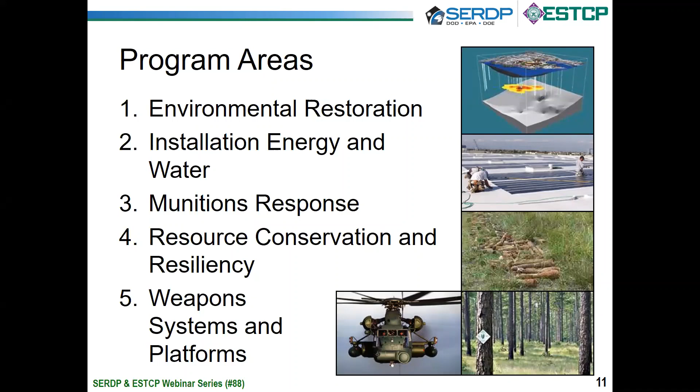There are 4 program areas in SERDP and 5 in ESTCP. The Installation, Energy, and Water program area is only found in ESTCP, while the other 4, Environmental Restoration, Munitions Response, Resource Conservation and Resiliency, and Weapon Systems and Platforms, are found both in SERDP and ESTCP, programs managed jointly by a designated program manager.

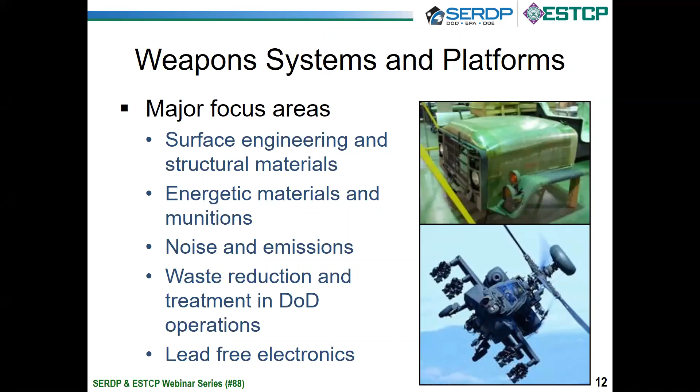Our webinar today is focused on research and demonstrations that were conducted under the Weapon Systems and Platforms program area. This program area has essentially 5 major focus areas. First, surface engineering and structural materials. Second, energetic materials and munitions. Third, noise and emissions. Fourth, waste reduction and treatment in DoD operations. And finally, lead-free electronics.

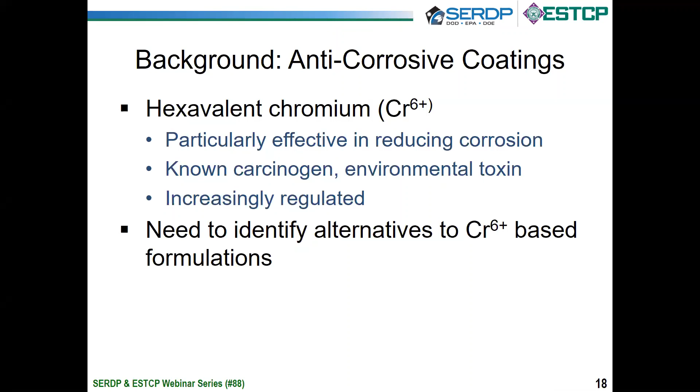As you're developing coating systems, it's important to understand if they're going to work on your system. The easiest way to do that is take components or samples, expose them outdoors at various locations, and see if they work, and you're going to know whether they work or not. The problem with that approach is it's time-consuming, and you can only put them in limited places. So if you want to accelerate the development of coating systems, you need some kind of screening test.

So in the Department of Defense, and in all industries for that matter, accelerated corrosion tests exist, and a number of those are available and widely used in the Department of Defense.

But here's the problem: they don't fully replicate corrosion observed, and that's particularly true for multifunctional coatings, which are most of the DoD stuff, at least for external mold line. Coatings that act as barriers but also have the ability to deliver inhibitors, or metal-rich coatings, to do protection. As you start having more functionality in coatings, these tests become particularly poor at defining performance.

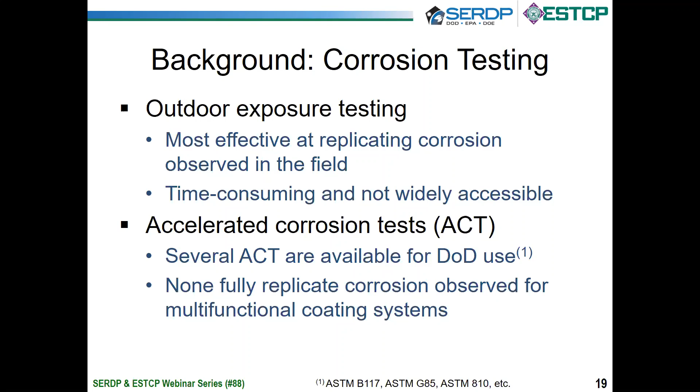So the objective of the 1673 project was basically to create an improved accelerated test, and there were a number of goals in that. The first was to accurately replicate corrosion damage modes, and then once we're able to accurately replicate them, we'd like to accurately rank materials performance.

So we've got this wealth of data from outdoor sites. Can we get in the lab the same rank order of performance? A nice side benefit of all this would be if we know the levers to pull to control the corrosion rates and the kind of morphologies, perhaps you can develop tests where we can control the severity in those tests. So that was an important thing.

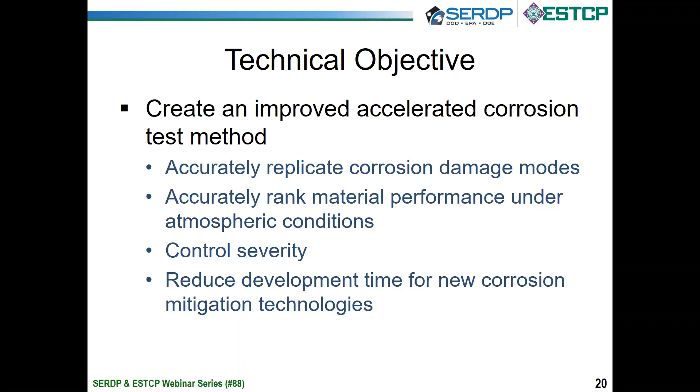But the biggest thing here is, again, these are screening tests. So if you want to reduce development time for new corrosion mitigation technologies, you've got to be able to test in something that's going to give you some general warm fuzzy that what you're doing is appropriate.

So there's a number of things that we did within this effort. The first was to integrate representative sample designs. We've used a one-off sample design from Naval, who were one of our team members on this program, a lap joint sample with fasteners, countersunk fasteners through that, and we had some Army replicate panels that had steel fasteners through panels as well.

This is to get away from the simple approach of putting a coated panel out with a scribe in it, because where we see failures isn't always in what I'll call the field, or even right next to a scribe. There's other things driving that.

The other thing that we wanted to do in this program was determine how critical environmental parameters affect corrosion and mechanical properties, and I'm going to spend the bulk of this talk talking about those. So what is it that drives it, and how and why?

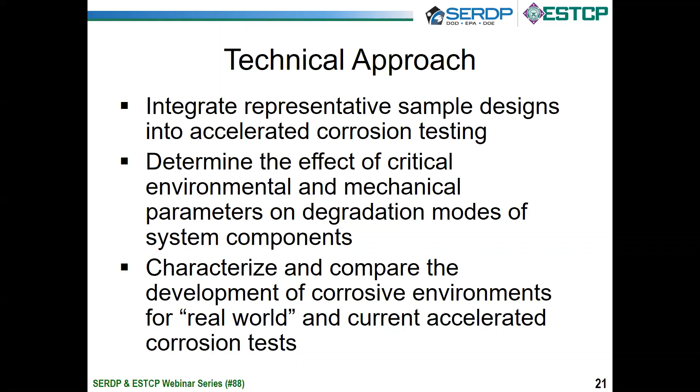And then the last thing we wanted to do is, once we understood what those levers are that affect severity and that affect different damage modes, can we look at what we currently do in the lab versus what's going on at real world field sites, and get an idea of what we're missing in the test, and try and fill in the gaps with that.

Okay, so I'm going to start focusing on some of the results here. For those of you who want in-depth details of all the techniques we used, I recommend, if you'd like to go read a 400-page report, go see the final report for this project. But there's also a number of publications and papers that document all the procedures in this. What I want to accomplish today is a high-level picture of a number of the things we found, particularly the effect of relative humidity.

All right, let me orient you to this first figure. What you see is on the x-axis relative humidity and then corrosion rate. These were samples that had a matrix of sodium chloride or other droplets put on them, and you can see the corrosion rate after one month of exposure. On the right, you see what are considered the ISO levels of high, moderate, low, and very low corrosion rates that you see in the field.

For those of you familiar with atmospheric corrosion testing and the ISO 9223 standard, one of the things they clearly note is that they believe corrosion happens above 0 degrees and above 80% relative humidity. So as you look at these corrosion rates from these steel panels, you can clearly see there's corrosion occurring at moderate and/or low levels, certainly down at 65%, which is well below the deliquescence point.

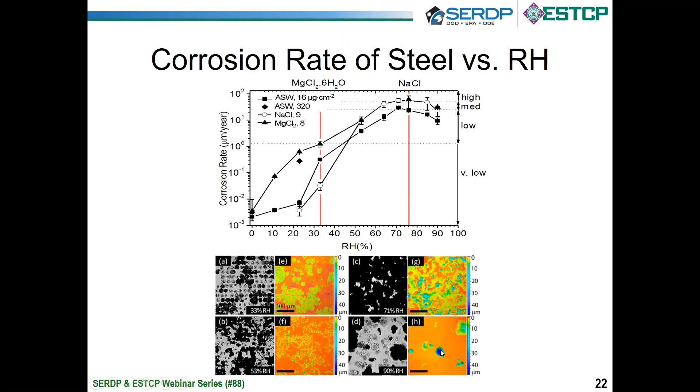The reason for that is because as you go above the deliquescence point, you get fully deliquesced salt, and the droplets coalesce into a thin film. So you have a large cathode. Instead of corrosion being driven by just what's going on around the edge of a droplet, the electrochemistry and cathodic reactions can occur at a distance. So you get single or small anodes that become very deep.

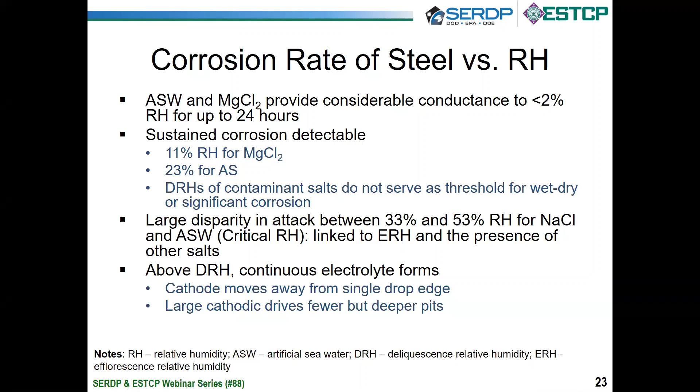So to summarize all of that, if you just looked at magnesium chloride, you can have corrosion going on down to 11%. And if you load up enough artificial seawater, corrosion can happen down at 23%. Again, it's very low, but it happens, and there's a large disparity of attack. So corrosion happens under the deliquescence point, and the morphology of that corrosion is very different under the deliquescence point than above it.

I'm going to move on to talking about aluminum alloys. What you see in these pictures are images from two different exposure techniques. This is the standard B117 continuous fog, and this is G85A5, the cyclic technique with a much more dilute solution, but pH'd at about 5 instead of allowing it to be neutral around 6.5 to 7.

These are aluminum panels with a CRES fastener, a stainless fastener through the middle. You can clearly see the difference in behavior from the continuous test to the cyclic test. So one of the things we wanted to figure out was why and what's driving this.

In a lot of the work we've done, we use multi-electrode techniques. Please refer to the report and papers written for the discussion of this. Basically we had 100, these 10 by 10 matrices that represent the electrodes, made out of wires that were 250 microns and close packed to each other. In this configuration, and in all these images, these 16 electrodes were made out of steel, and the rest were aluminum.

The other thing I'll note is anything you see in red here is corrosion, and anything in blue is a cathodic reaction. The last thing I'll mention is that the top 5 rows of electrodes were covered. In these images they're covered by tape, just blocking them. In a slide I'll show you later, these are actually covered by paint films.

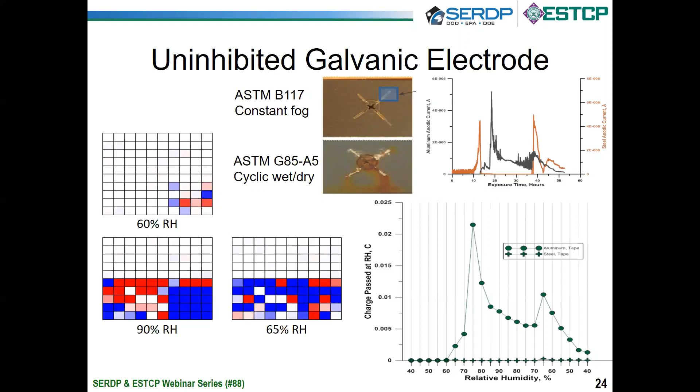Basically, this is increased corrosion rate as you go through wetting and drying. So this is under more or less steady state electrolyte conditions. Why this is important is because if you're cycling tests, if you have very short wet cycles and very short dry cycles, these surfaces may not come to some kind of steady state condition as they're passing through wetting and drying, and you end up with very high corrosion rates. As I mentioned on the last slide, what you see as subdeliquescence corrosion can be significantly different than what you see in corrosion that occurs above the deliquescence point.

All right, so this is just summarizing that. What I'll say is that relative humidity suggests that relative humidity is the strongest thing governing galvanic coupling. Again, most of that charge, there's a large amount of charge that's passed as you go from wetting to drying conditions. But even under the wetting conditions, you can clearly see that corrosion happens. Corrosion, again, does happen in galvanic couples below the deliquescence point.

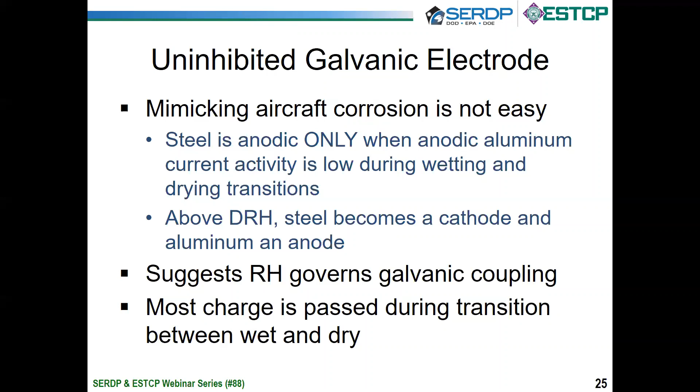The next thing I'll talk about is some work that our team members from Luna Innovations had done for us, in conjunction with some work that we did on this. So what we did was took small coupons, an inch, and put through those a fastener, a steel fastener, and then we coated those with a number of coating systems, either non-chromes or chromes, or left them. We've exposed these things to a number of cycles, which you can see here.

Let me point out a couple important facts here. In this first cycle, you can see that we're at 90% relative humidity, and we dropped that relative humidity down to 40%. So this is a two-step cycle. We hold that at 90 for 2 hours and dry it for an hour. In the second cycle, we have the same wetting and drying time, but instead of drying it, we drop the relative humidity only to 65, so that sub-deliquescence point.

But we know corrosion is still occurring. And in the last, we fully dry it, but we completely change the time of wetness. So this is the absolute time of wet in any given cycle is increased by a factor of 4. And let me point out that all of these have the same total time of wetness through the test. The other thing I'll note is we only put salt on this once a week.

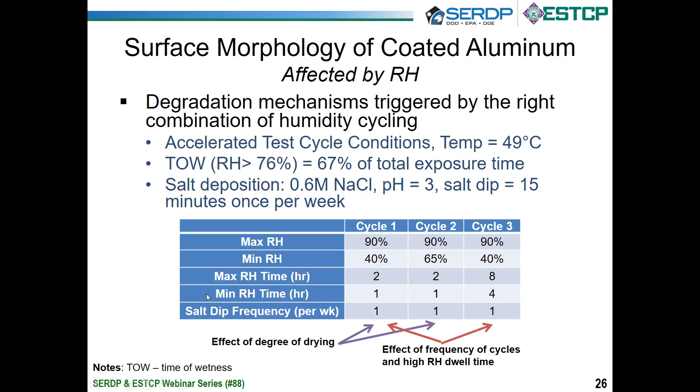This is a modified, basically the ASTM G85, so acidified salt, and we put this through this cycle. That salt was only applied once a week by dipping the panels. You'll see in the next slide the kind of damage that we see. I don't have an image of the first one, but I can tell you that there was delamination, though there was very little depth of the attack.

So it was small depth of attack with significant delamination. The interesting thing starts happening in cycle 2, where we did not fully dry it. On the left you see the digital images, and on the right the digitized images, so actual photographs and then the digitized versions.

The thing you notice in this test is that we see this exfoliation corrosion. These red things are above the plane of the surface, so we basically significantly exfoliated the surface. All this stuff in blue is corrosion that happened, and this outline is where we've delaminated coating. So there's no coating here, and corrosion has occurred in this area.

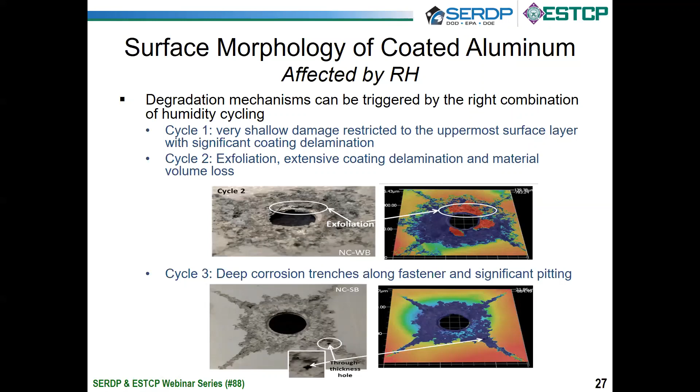In the third cycle, where we fully dried the sample, we again see fairly significant coating delamination, but very deep attack. In fact, this is a pit where if you hold it up to the light, you see light coming through the sample. So the kind of attack where you see exfoliation happens in these semi-drying conditions, but also the degree of attack is a function of the total time of wetness in a given cycle. These two samples saw the exact same total time of wetness, and how we distributed that across the cycle was important.

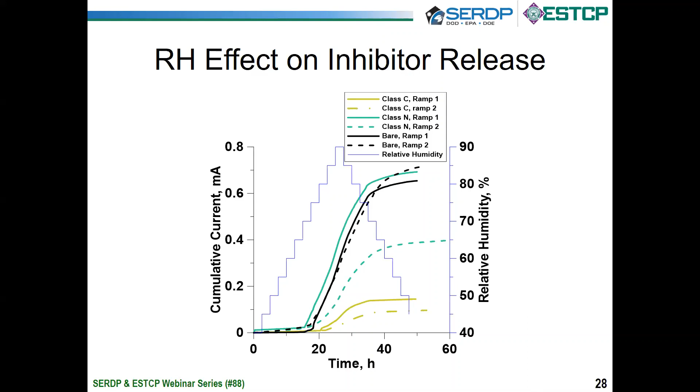So this may explain some of the phenomena we see in accelerated corrosion with non-chromes. There always seems to be some staining in the scribe, particularly true for accelerated corrosion tests.

To summarize, looking at the cumulative currents, you see these big knockdowns. So you need some kind of initial wetting that goes on before you can release these inhibitors, and then you protect the surface during subsequent wetting. This just kind of quantifies that a little bit.

You can see in this last row here a knockdown factor from the first and second cycle, and that's true for both chromate and non-chromate, class N coatings. But it's particularly interesting to look at the total that's been knocked down from the original amount. For a chrome coating, we're only about 10 to 15% of the cumulative currents passed, and only about half the currents passed otherwise. So you can see how much more effective chrome is as an inhibitor compared to these non-chromes.

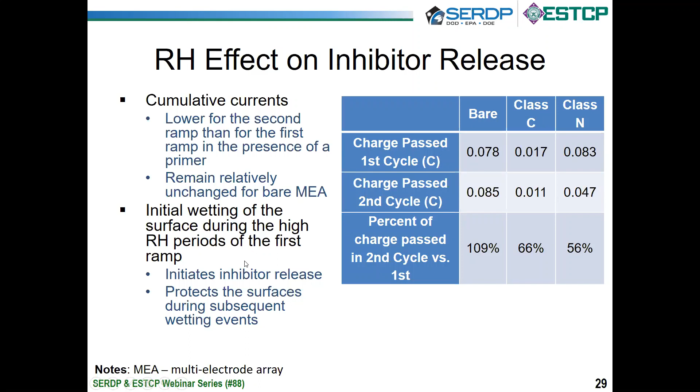Okay, next thing we wanted to look at was intergranular corrosion and stress corrosion cracking. This data is also from Luna Innovations, the team members there.

To orient you, this is relative humidity, this is crack growth rate, and what we did was cycle the relative humidity going both directions. Luna has developed some pretty nice sensors for measuring crack growth rates in situ. What you see here is that as you cycle the relative humidity forwards, you're on this set of curves; as you cycle it backwards, you're on this other set of curves.

The point I want to make is as you cycle these things backwards, once you're in this subdeliquescence region where we see exfoliation and corrosion still occurring, you get large increases in the crack growth rate. In this example, these increases in growth rate become more severe the longer you run the test.

I'll note these things are also a strong function of the solution chemistry, so pH and what you do. If you were to run this in a G85A5 versus an A2, you get significant differences in behavior. Let me note, this is data from the G85A5, so the dilute chloride at a pH of about 5.

You might say, oh well, this is sensitized, and this is a pretty highly sensitized 5000 series alloy. But we've done, and Luna has done, work on 7000 series alloys, and you still see the same kind of effect. In fact, up to a factor of 10 if you're looking at some of the fatigue data not shown here, from other work that we know.

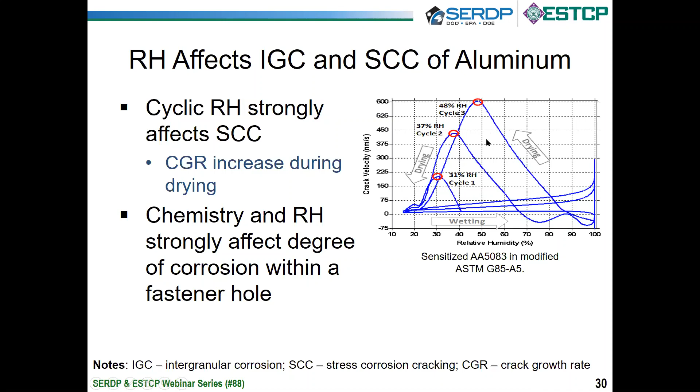Also, mentioned exfoliation. As a portion of this program, we had samples exposed outside. These are images down a fastener hole, actually from Point Judith, an industrial coastal site that Alcoa owns. So what you're looking at is the edge of the 7000 series aluminum. What would have been here was a fastener, and you can clearly see the significant amount of intergranular corrosion going on in here.

This was a panel exposed by colleagues at AMCOM that did these, and if you look at that same sample, you see this intergranular corrosion in here. This was a separate sample we exposed to an environment developed at the University of Virginia, very close to the ASTM G85A2.

The cycles are a little bit shorter. The main difference between these two environments is that the pH is dropped to about a 3. Now let me note that you do not see any of this intergranular corrosion at all if you just put this in a B117.

So two things are important: number one, you need cycles to imitate this, and if you want to drive it faster, you can change the pH in the solution.

So again, we think this middle relative humidity range, moving into this, accelerates exfoliation and accelerates intergranular corrosion. We think the intergranular corrosion is actually partly related to what's driving the increase in crack growth rates during drying cycles. You see the corrosion happens, and clearly the morphology strongly affects delamination.

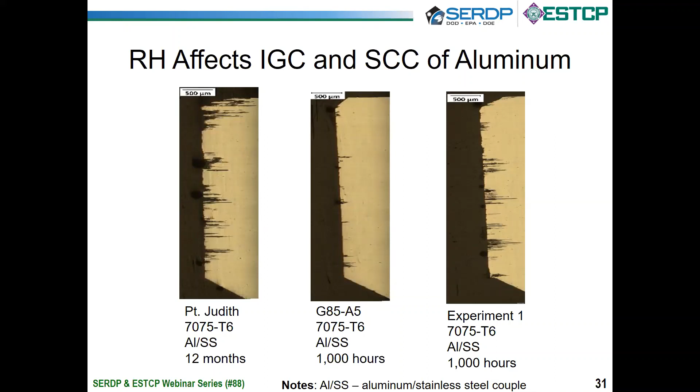All right, so that's important. This is a bit of an eye chart, and I don't expect you to read all this, but I wanted to point out a couple of things.

We ran some of these tests outdoors, and what we wanted to do is block out the percentage of time that in each environment we spent in specific regimes of relative humidity. For these outdoor samples, you can see they're between 40 and 50% relative humidity. This is the percentage of time above deliquescence, this is the percentage of time in that sub-deliquescence but corrosion range, above 50%, and this is below.

We can compare these to what you see in the rest. These are marked green because that's what you see as aggressive corrosion outside. Our laboratory tests are marked in red. Some of these are really aggressive, and you saw some of the images from that.

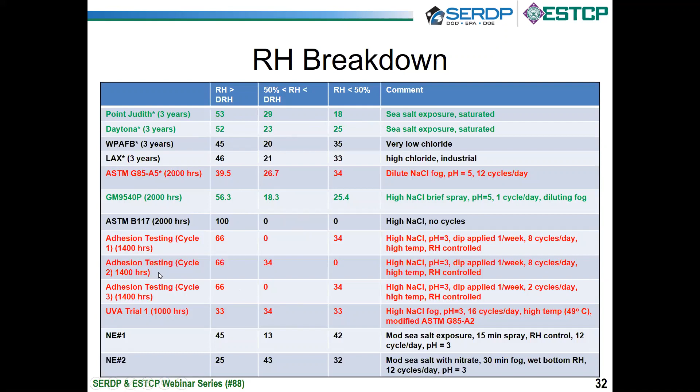So to summarize, we know we've got to have cyclic humidity. If we don't have it, we don't fire off the failure modes that we see in the real world, like I showed you in Point Judith. The other thing we know from real-world tests is if you want aggressive environments, you've got to be above 50% relative, or above the deliquescence point, 50% of the time.

In terms of coating delamination, it's a strong function of the time of wetness within a given cycle, as I showed before. Not only did we see the degree of attack change, the amount of corrosion changed. I'll show you that on the next slide.

In this figure, you can see the total time of wetness in each category, during wetting and drying in those intermediate ranges. These red bars represent the sum of these two. The important thing to note is these are the aggressive environments with their high percentage of time, but again, it's the amount of time in each cycle that's important.

If you have a complex coating system, like I mentioned before, and showed in the data that Erica Maka had done, you need a certain amount of time before you can activate inhibitors, or in the case of metal-rich primers, a certain amount of moisture has to ingress before you see the galvanic effects you're looking for. So again, this is important to consider as we're doing tests.

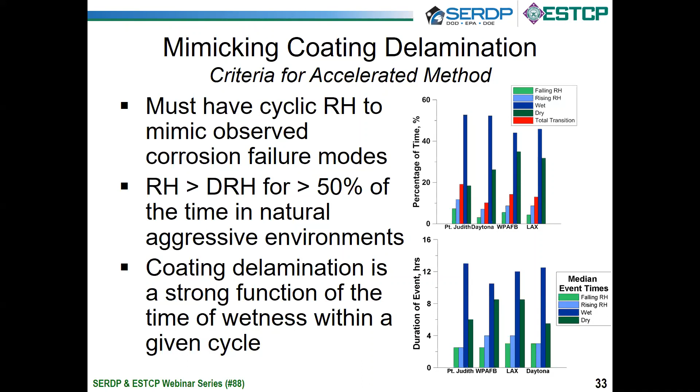These actually came from sensor data that's been out in the world. For those who don't know, there are other programs funded by both the Navy and the Air Force with multiple sensors at multiple locations, gathering large amounts of data on this.

Here's the interesting thing, though: if you look closely at that table, it's not simply a matter of time in the wet cycle, it's a matter of solution aggressiveness. In some of the solutions, we actually had very low wet time, but the solution was extremely aggressive. So there's a trade-off between the aggressiveness of the salt solution on the surface and the time of absolute wetness.

This is just a couple of examples, looking at surface delamination from those two cycles I mentioned before. Both of these fully dry, but cycle 3 has much longer time in the cycles. The amount of surface delamination, basically coating peeling off the surface, is greater the longer the time in any given wet cycle, even for the same total time of wetness.

Because of the aggressiveness of that attack, which is directly related to coating delamination in this more aggressive environment, this may be one of the tools we have. At 500 hours, we can distinguish coating performance, whereas if you run salt fog, you can run it for 3,000 hours and not see any difference. So what drives aggressiveness of solution is the pH.

I showed that in a number of cases. Obviously it increases salt deposition because it increases the surface area and taxes inhibitors more. And then the other thing is the amount of time above the deliquescence point, as I demonstrated here.

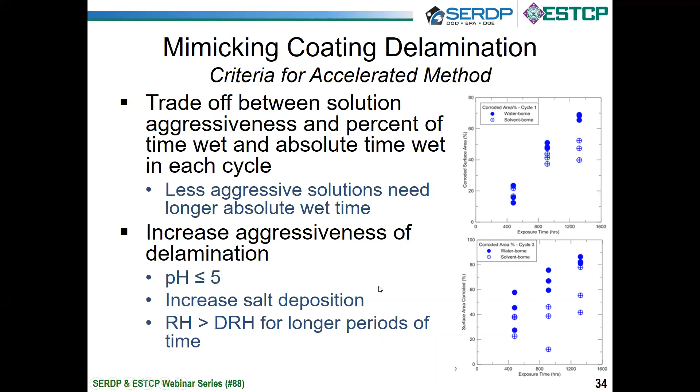All right, so with that, I'm going to start to conclude here. The single most relevant factor in atmospheric corrosion is relative humidity, but it's not simply the relative humidity—it's specific regimes of relative humidity. If we want to accurately replicate conditions, we can't just say ramp time this much; we've got to strictly control that. Atmospheric chemistry also plays a large role—pH and the amount of salts—and that has to be balanced with relative humidity in our accelerated tests as we move forward trying to find something better than this.

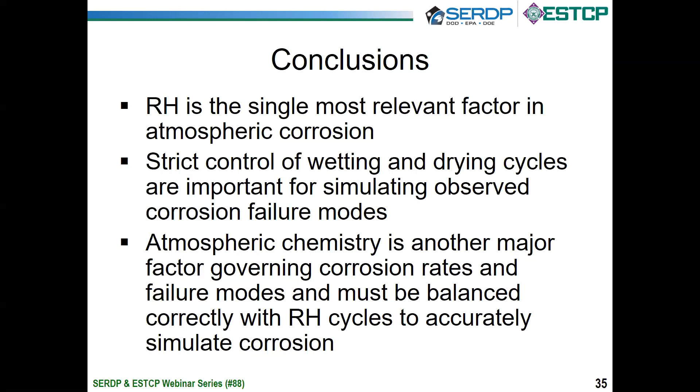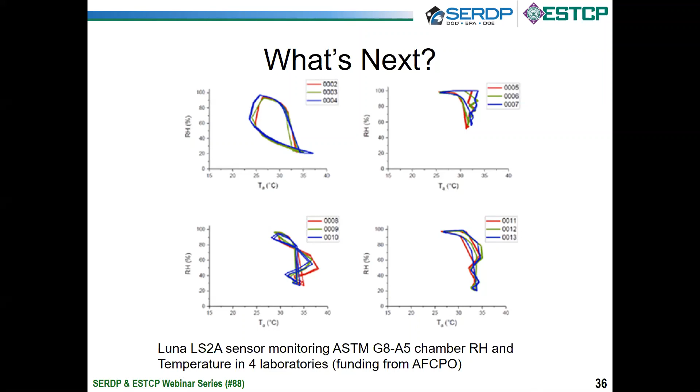Just to show you that middle point about strict control, this is some data funded by the Air Force from a program Luna had. If you put sensors in a chamber and monitor temperature and relative humidity as you cycle through, each chamber has a certain footprint. These are four reputable labs that have done this, and you can see we all follow the specs well, but our chambers didn't obey—well, they just work the way they work. So you wet for so much time, you dry for so much time, and hope you get the ramp rate, but how it gets from one place to the next is completely different. This stresses the importance of being able to define specific regimes of relative humidity.

So the next steps—and Alex will be talking a bit about this later—involve a follow-on ESTCP program to help finalize these, benefiting the Department of Defense by developing improved standard protocols. So what do we do to have some assurance in this as we develop more and make decisions about whether to take things to long-term field testing or put them on aircraft?

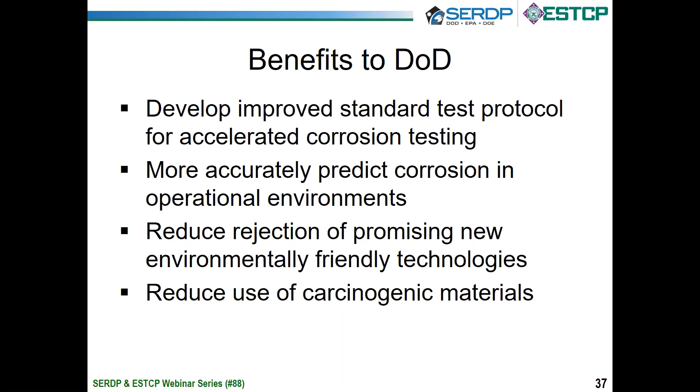So we can more accurately predict corrosion, and reduce rejection of promising new technologies—we reject things at the lab stage that look really good in the field. The opposite is true too: we let things through these screening tests, put them in the field, and they fail miserably. The ultimate goal of this is to reduce the use of carcinogenic materials, not just in the paints themselves, but in the cleaning processes afterward.

As I finish up here, I just want to acknowledge all the folks that took part in this. It's a nice combination of work by industry, government, our government lab partners, and universities also in the mix. This was fun to wrestle through the program, but I think we've learned a lot of nice stuff.

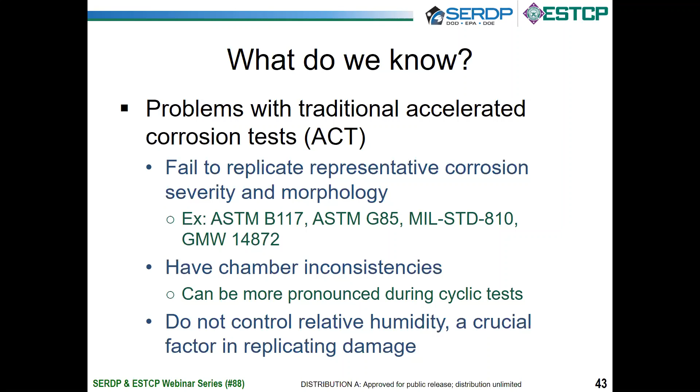Slide 44, please. So what can we do to address those issues? First, we want to understand the individual and combined factors that relate to the type of corrosion we're observing. We're doing that by controlling a few different factors, one of which could be the relative humidity we're operating the test at, or the ratio of wetting and drying times to control things like crack growth that Jim mentioned earlier, as well as solution chemistry.

We'd like to implement more representative solution chemistries applicable to what we'd see in the operational environment. We also want to better understand the dynamic effects of the environment on the type and severity of corrosion. When I speak about dynamic effects, I mean day to day, hour to hour - how the temperature and humidity are changing, and how that affects the type and severity of corrosion we observe.

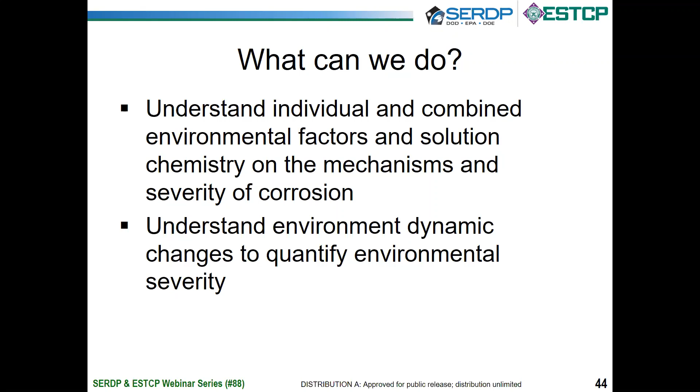Slide 45, please. So more about dynamic monitoring. What is currently being done for most corrosion testing - the best way to observe how a coating or new corrosion prevention technology will perform, or how it ranks against what's currently out there - is we deploy test coupons in actual operational environments for sometimes 1, 2, or 3 years at a time. With this, we basically only have 2 data points: how the samples were deployed and what condition they were in when deployed, and after we retrieve them, what's the condition at that point.

And so that's what we are talking about when we say cumulative data only. We have very little information about what is occurring day to day, how the corrosion is progressing, or how the failure mechanisms are progressing day to day, what is causing those failures. So what we'd like to do is figure out better ways to measure that data and quantify corrosion severity over the exposure period of your outdoor field exposure.

Like Jim mentioned, these outdoor field exposures are very time consuming, not very widely accessible. They can only go in certain places. So we want to try to fix this issue and see how that will impact the design of new accelerated corrosion tests.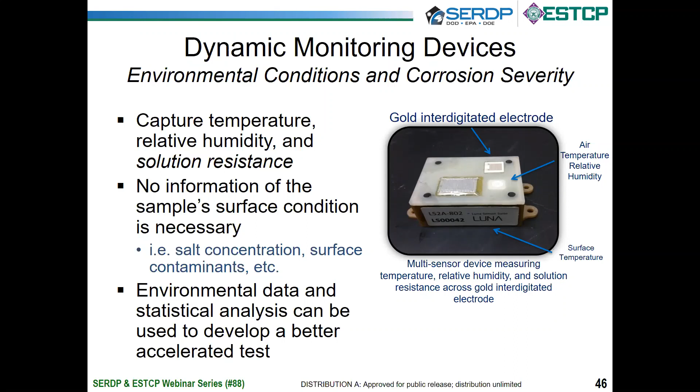What we've been able to do is develop a statistical analysis tool to quantify the relationship between solution resistance and absolute humidity in order to assess the overall environmental corrosion severity for a given exposure.

What's currently used to assess environmental corrosion severity is ISO 9223. This classification looks at 3 key factors, which are time of wetness, deposition rate of chlorides, and SO2 concentration. The main issue with this method of classification is the distinction of a wet environment being only greater than 80% relative humidity and greater than 0 degrees Celsius in terms of temperature.

We've collected data that shows you can have wetness events below this relative humidity, and that's all very closely related to the geometry of your corrosion that's going on, as well as the salt species that are present. So a lot of what we want to be able to do is quantify the time of wetness and make a distinction about how this severity classification fails to accurately assess time of wetness.

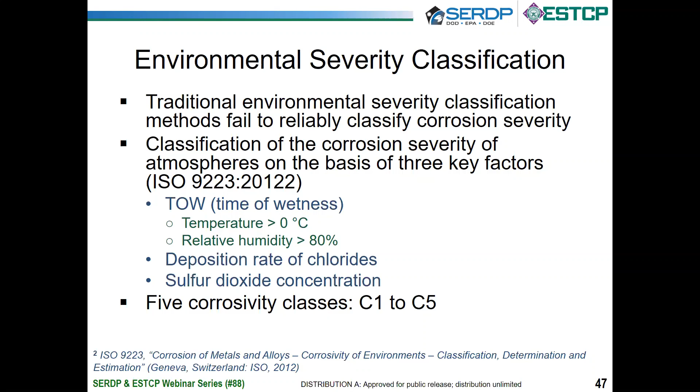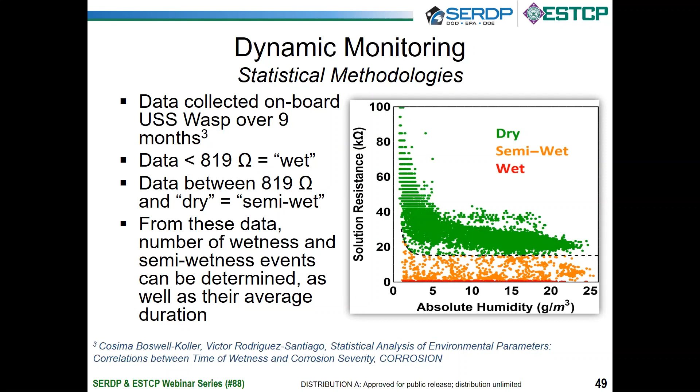So where this fits in the overall scheme of ACT development is we can use, like you see on the left, mass loss coupons along with our dynamic monitoring sensors. We can then analyze that data to capture the temperature and relative humidity cycling that we're seeing in the operational environment, what that means in terms of the number of dry versus semi-wet versus wet data that we're measuring, and we can use that information to inform new accelerated corrosion testing.

And theoretically, this could be used based on geographical or different operational environments to say that we can design accelerated corrosion tests specific to the operational environment.

In the table below, I'd like to point out the most important column is the rightmost one, where using accelerated corrosion testing with this methodology, we've been able to replicate 4/9 the amount of mass loss in about 1/30 the amount of time for aluminum 70-75, and about 1/4 of the mass loss in 1/30 of the time for 10-20 carbon steel.

This is significant in that the main goal is to provide representative corrosion in the form of an accelerated corrosion test so that we don't have to rely on outdoor field testing, which takes a long amount of time to qualify or validate new corrosion prevention technologies.

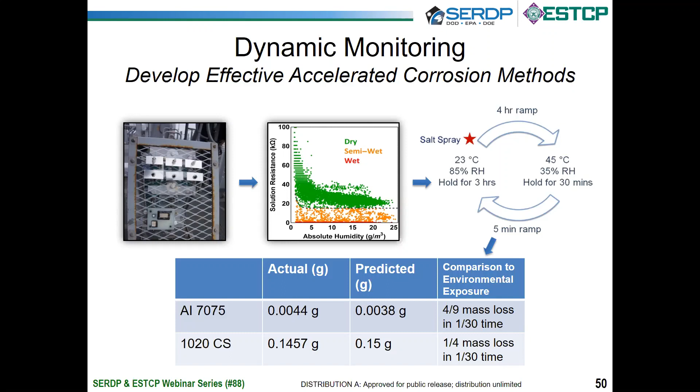So we've identified these three parameters to be the main parameters that we can tune to change either the attack morphology or the degree of attack. We're using this information, a lot of which was provided during WP 1673, to design and test our new accelerated corrosion test methods with this effort.

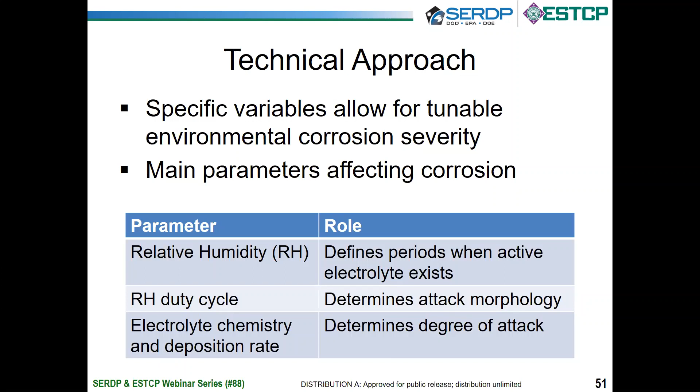So the innovative technical approach is that we're relying on cyclic variation, which is informed both by previous research and by data collected from the operational environment: cyclic variation of relative humidity, as well as the salt deposition of specified salt solutions.

As I mentioned before, traditional cyclic tests cannot provide this degree of control for relative humidity, and we've seen a large amount of variation in results from these tests as well. A lot of this understanding has been gained within the last 5 or 6 years, so we feel we are on the forefront in terms of developing this technology.

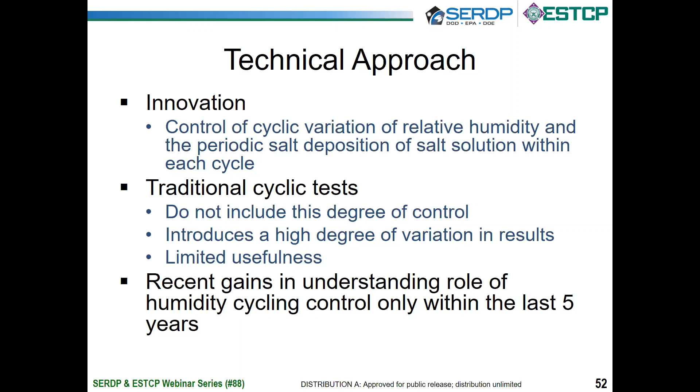So task 1 for this effort is to test a total of 6 different environments, and how we've split those up so far is to test 2 solution chemistries and 3 relative humidity cycles.

This will be done mainly to identify the controlling chemical species in the solution chemistries that mandate or offer different corrosion severity or attack morphologies. Also, the 3 relative humidity cycles will do the same, and hopefully we'll get a better idea about what exact parameters in the relative humidity cycles control the mode and extent of corrosion that we're seeing.

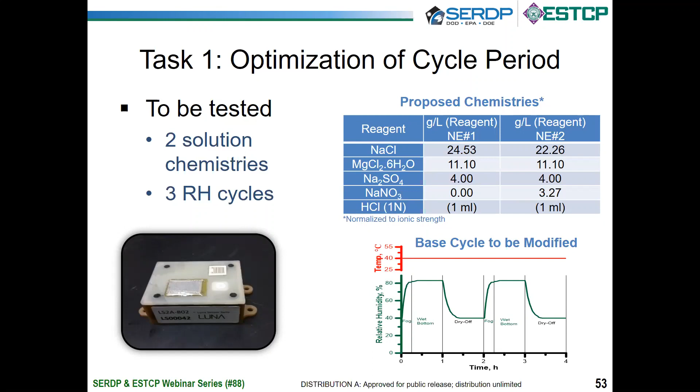So we're planning to assess the corrosion type and severity using optical profilometry. And then after that, we're planning to rank coating performance and environmental severity using image analysis.

At the end of this task, we'll reach a go, no-go decision based on whether we've been able to correlate and provide representative corrosion types and extents that we can see in outdoor field exposure, but at 1,000 hours of accelerated corrosion testing. And that the results from this accelerated corrosion test provide an ordinal ranking of coatings that we would also provide using outdoor field exposure. Next slide, please.

Task 2 will be round robin testing, again to address the variability and lack of repeatability that we see with current accelerated corrosion testing. This will be completed by a number of different laboratories: Naval, Southwest Research Institute, Boeing, Army Research Lab, AMCOM, AFRL, AFLCMC, as well as Q-Lab, the manufacturer of the corrosion test chambers that allow us to have tight control on those relative humidities.

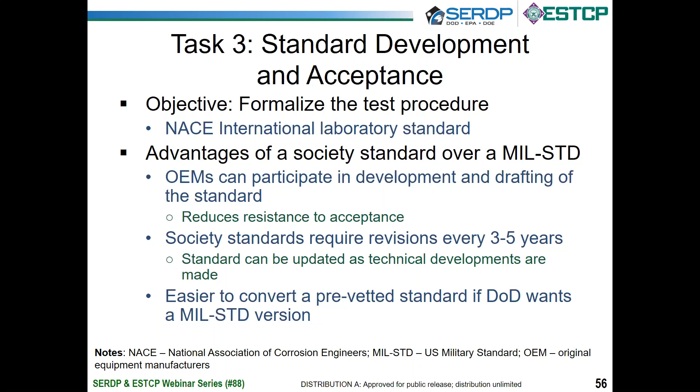Slide 57, please. We're also planning to create a NACE task group within STG 41 to develop this specification. How we view the specification being written is the front end will define the overall testing approach, and then as new operational environments are required, we can add those amended test cycles to the annex of the specification, such that we're producing a standard that can grow as the demands of the aviation industry change or additional operational environments come up.

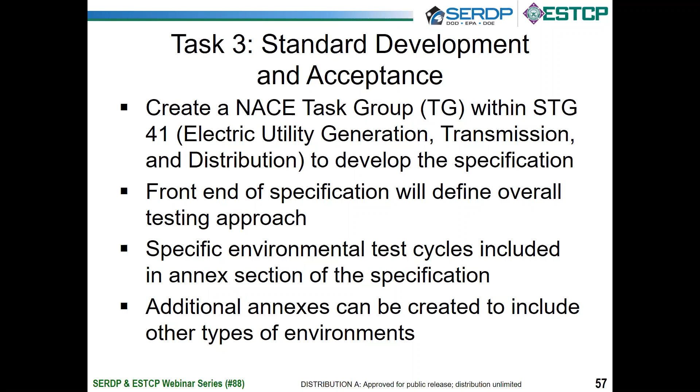Slide 58, please. So to wrap up, dynamic environmental monitoring devices, as well as data analysis methodologies, allow us to correlate environmental conditions and corrosion severity. Again, we did that with dynamic monitoring sensors, which capture temperature, relative humidity, and solution resistance, which allows us to much more accurately quantify the environmental exposure of any outdoor field exposure samples, so that we do a better job of replicating those same conditions during accelerated corrosion test development.

Also, we plan to observe more the combination of effects observed from varying solution chemistries, time of wetness, and drying to wetting time ratios, so that we can fully tune corrosion severity as well as control better the method of attack during those tests, so that they're more representative of what we would see in the operational environment.

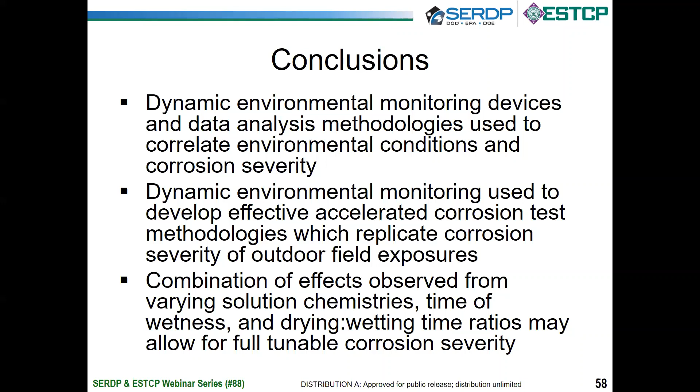Slide 59, please. We also plan to assess corrosion severity and type of corrosion using 3D image analysis and optical profilometry. This will allow us to have a better quantifiable way to assess the type and extent of corrosion.

Overall, our plan is to develop a more representative and reliable accelerated corrosion test standard through inter-laboratory collaboration. Again, we're doing this through round-robin testing to address the issue with current accelerated corrosion tests and their variability, both between labs and between tests.

Slide 60, please. The benefits to the Department of Defense are mainly to accurately identify new corrosion prevention technologies. Like Jim mentioned earlier, there are times where corrosion prevention technologies fail in accelerated corrosion test methods that otherwise perform well in the operational environment, and the vice versa is true as well.

And so we want to have better testing so that we don't waste time with technologies that don't offer the corrosion prevention that we need, as well as get the technologies that do offer corrosion prevention out to the fleet. This also will help us understand risk better than what we currently are able to do with accelerated corrosion testing.

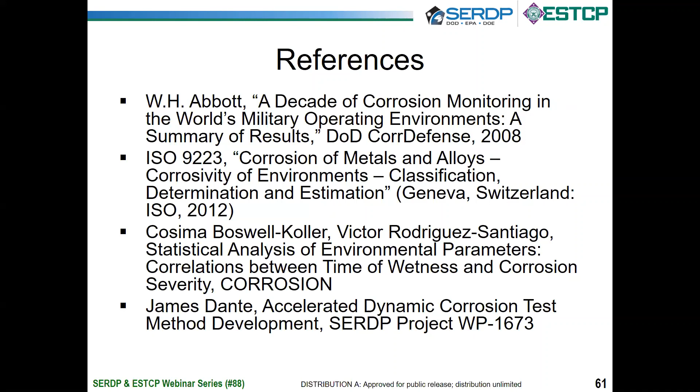So first, could you explain the connection between this project and SERDP and ESTCP's initiative to reduce the generation of hazardous materials? Sure. So our main goal with the development of this test method is to more reliably and quickly qualify and validate new corrosion prevention technologies. And with the emergence of the regulation of hexavalent chromium, we're anticipating this demand to increase very much so.

And so with this, we're hoping we provide a tool to the aviation industry to incentivize the development of non-chrome materials, which I believe the reduction in hazardous processes was one of the ESTCP initiatives.

Are the dynamic environmental monitoring devices commercially available, and if so, where can they be purchased? I know that they are produced by Luna Innovations, which I believe would be commercially available, but I am not 100% certain on that.

In the Luna sensor, solution resistance depends on electrolyte concentration and thickness, so the corrosion rate is a function of concentration and thickness. Do these effects need to be separated?